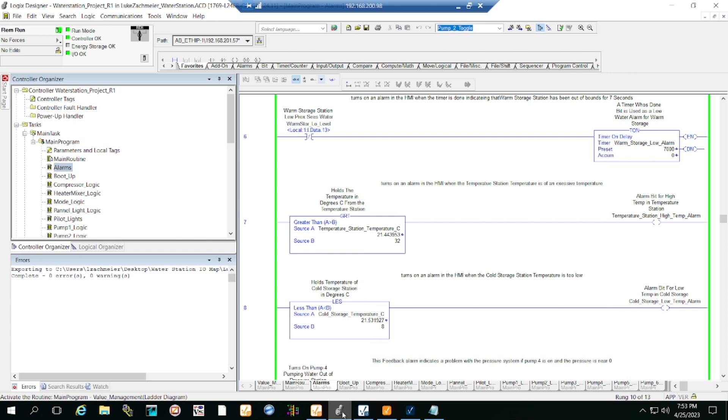Now, if you watch that, you'll notice that this project already has an HMI. So why am I making the same HMI in a different software? I can hear you asking yourself right now. Well, aside from the fact that Ignition is awesome and I really need experience with it for my job, which are both true, Ignition does some things that are really nice for us.

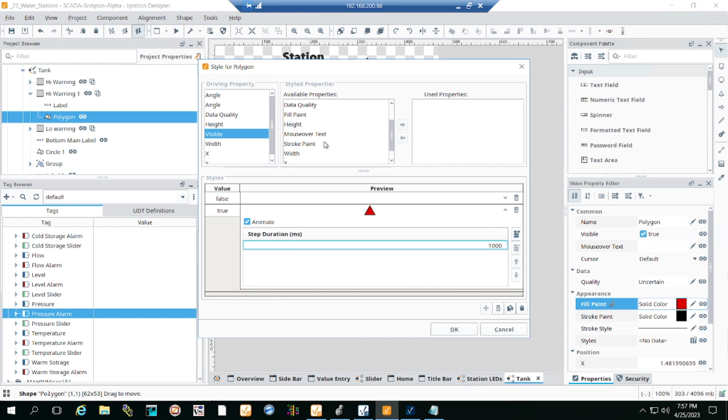First and foremost, I completely ran out of space in my FactoryTalk, and seeing as how it was only designed for a PV1000, which has the dismal resolution of 640 by 480, not even cracking quadruple digits in either dimension, if I wanted to add anything, which I did, multiple things, I wouldn't be able to. And while Ignition won't run on a PanelView, it will run on a browser.

Also, Ignition being newer than FactoryTalk by what I can tell approximately 12 decades means it has a lot of really nifty functionalities that make HMI development a breeze. First, scripting with languages like Java, Python, JSON, SQL, HTML, CSS, and more means that the only limit to your HMI is the time left in the semester and the limit of your sleep schedule.

The only downside here is the complexity. Some things are certainly easier in FactoryTalk, but as far as I can tell, almost never better. It may have taken me a whole day to make a custom slider, but now it's a drag and drop template for me to use wherever I want.

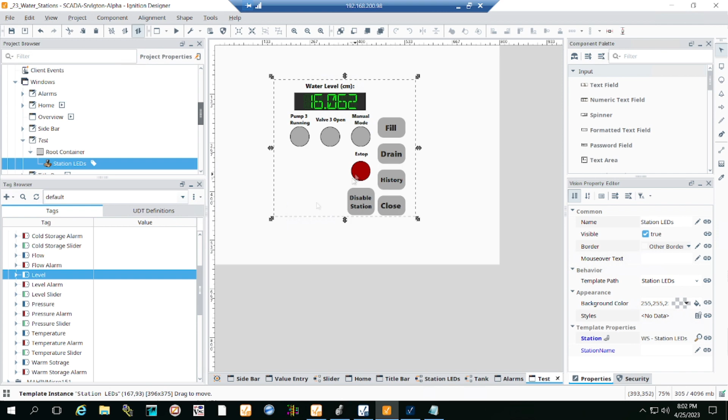Not to mention that with the gateway, from the moment you start a new project, SQL databases and security groups are already all configured and ready to go without the arbitrary 26 security group limit, unlike some other HMIs I can mention. Third, with modern features like templates, custom properties, and UDTs, making graphical windows for all 3,682 of your essentially identical fans has never been easier, and I promise Ignition is not paying me to say any of this.

Finally, name one other HMI software that has an equally comprehensive and in-depth training course, free to use, available to everyone. Go ahead. I'll wait. Okay. We get it. So Ignition is new and shiny, it can do some stuff that FactoryTalk can't. What's my bottom line here?

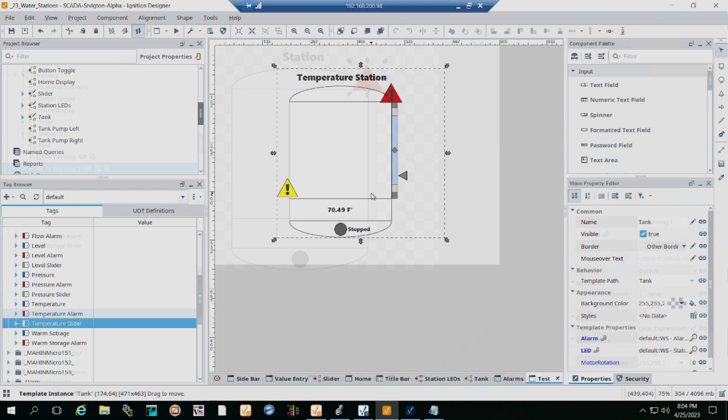Well, aside from upgrading to a graphics scheme from this decade as opposed to this century, the HMI is now future-proof. Think of some awesome new thing that you want to add to your HMI? $10 says you can do it in Ignition, and another $10 says it's easier to do in Ignition than in FactoryTalk or iFix combined. Want to make a circular slider in FactoryTalk? Good luck.

Finally, let's say I add a new station to the project. All I have to do is drag a couple of templates into Ignition, put all my relevant data in a UDT or two, slap them together, and go home. No need to manually bind each and every tag. This concept can be expanded to windows, as you'll see later. Now that my Ignition ad read is over, let's get into the actual project.

The title bar really just tells you what window you're looking at, and also the time and date if you're like me and can't remember what day it is. It also lets you log out and close the window if you have the proper permissions. The overview page displays each station and shows you which direction the water is flowing, along with some basic process information for each station at a glance.

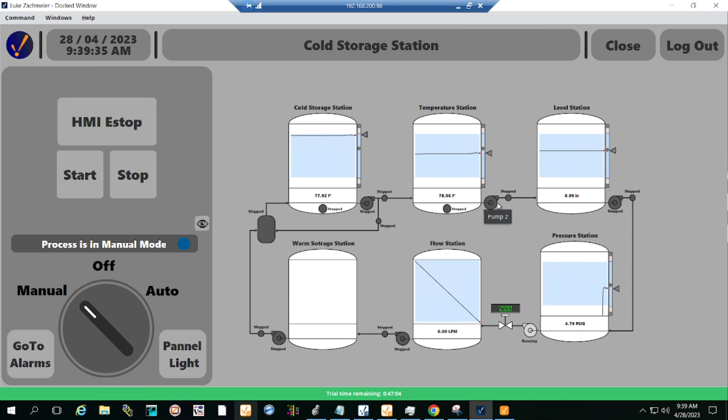It will also show you if the water level is in a dangerously high or low position, as well as if there are any alarms currently active on the station, and you can click on the alarm to take you directly to the alarms page. Now the sidebar here has your system-wide controls, and you can see more or less by clicking this little button here.

Now one thing that I really tried to add to this HMI is almost every object, if it does something or tells you something, you can either hover over it and it will highlight to indicate that it can be clicked, or a tooltip will pop up telling you what it does or what it's trying to indicate. I think that just helps usability a ton.

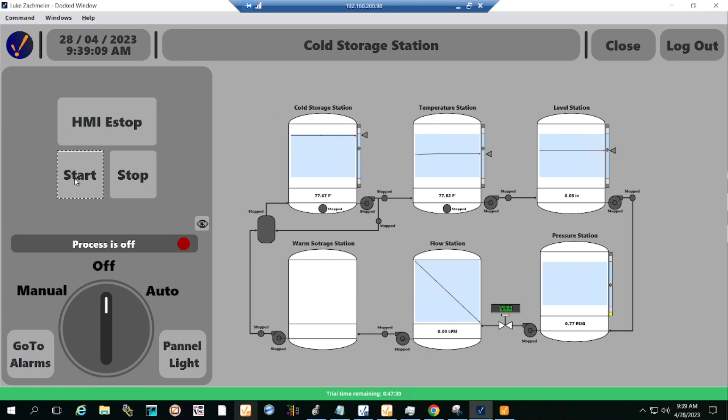Now this overview here is where all the magic happens, because if you click any one of the stations, it will open that station's details. Now this is just one window with a couple templates on it that can display any station's information. I do this by passing the window the station's UDTs when the window opens up, which are accessed by the templates to change what is displayed. But it is from here that you can control each station.

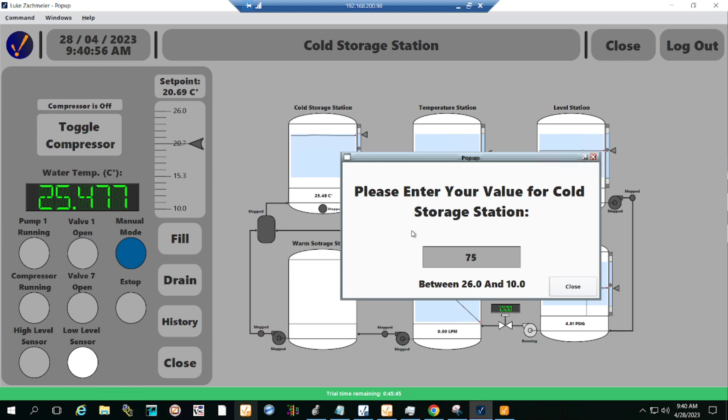And just as before, you can change the units by clicking on essentially any units. I really liked this feature before and I made sure to bring it back into this HMI. However, clicking on some of them won't change the units, but will instead bring up a window to let you enter exactly which value you want, as opposed to trying to get it precisely on the slider, and it will go out to 2 decimals.

Now this is another singular window that I pass UDT information for it to change what it does dynamically. Another really cool thing about this window is if you open it up and change the units, it's not going to break the system. You can enter the units in Fahrenheit and it will convert them to Celsius for you.

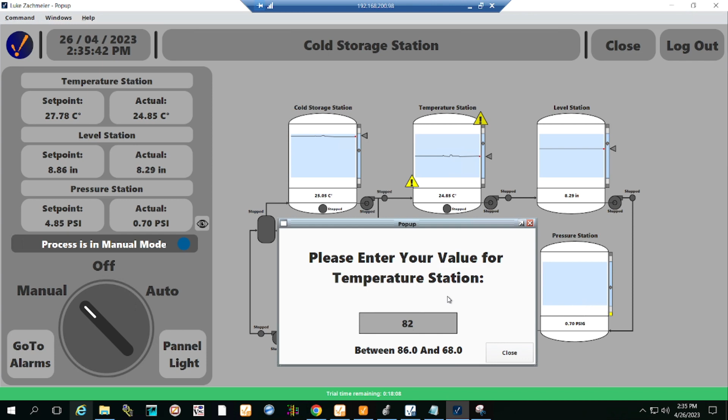Finally, you can go to either the alarms or trending page by pressing the corresponding button. In the alarm page, you can customize which alarms are displayed if you don't want to see acknowledged alarms or cleared alarms. You can also see an alarm history. And to access trending for a station, simply click the trending button on that station's details page. From there, you will be able to zoom in, zoom out, and change the scope of the data you want to look at, as well as change the chart to your liking.

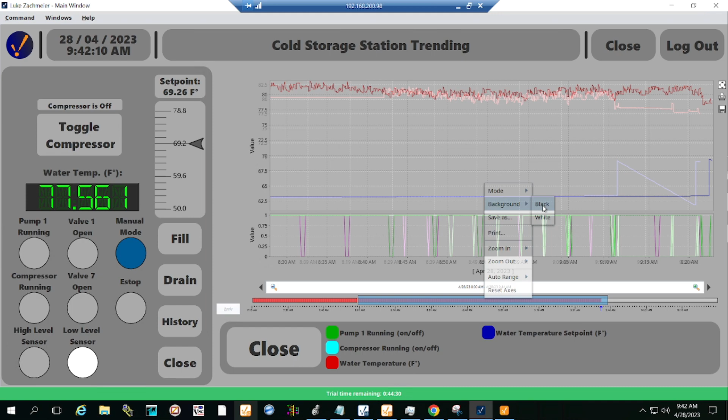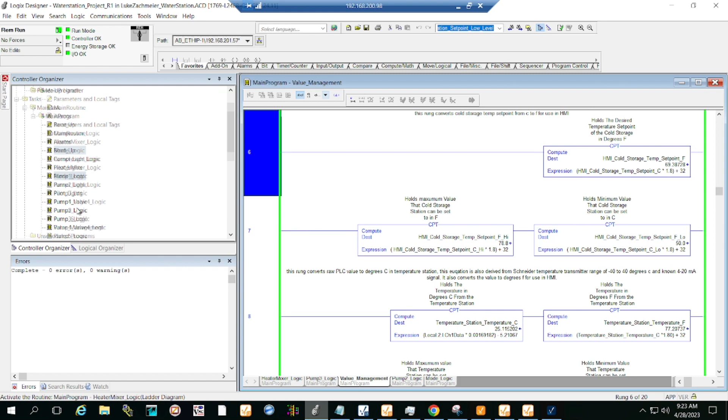As far as the PLC program goes by itself, the only changes I made were I added tags to store the set points in separate units, as opposed to just calculating them and sending them back. This means that if I make another HMI in, say, iFix, I can access those set points without having to do the math in the HMI.

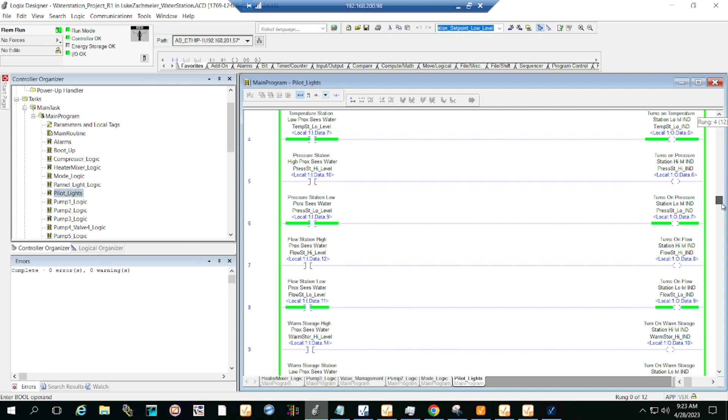Overall, I'm sad that I ran out of time to work on this HMI. There are so many features and additions that I could add that I can easily see myself working on this project alone for another whole semester. However, all good things must come to an end, and as this semester is coming to a close, my sleeping schedule is reaching its breaking point.

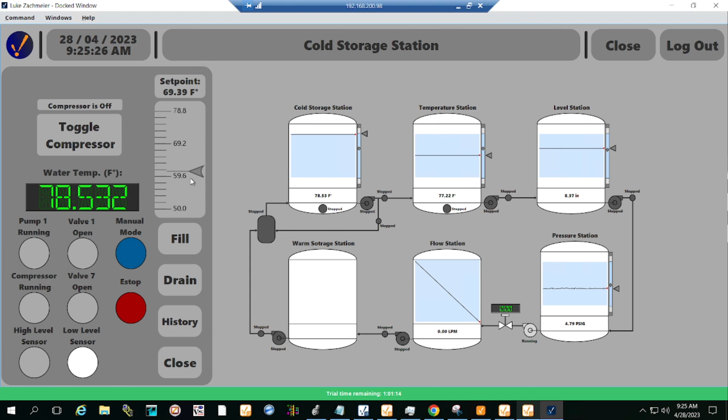Despite that, I think I was really able to explore the possibilities of Ignition and was successful in creating a high-performance HMI style, though even I'll admit it's not the greatest. I certainly made my life 1,000 times easier through the use of templates and UDTs. I think this HMI is more user-friendly than my last one, simply because of the feedback and the tooltips.

However, behind the scenes, this project is a complete mess, plagued by lack of planning. I can't blame myself, as I had no idea what a UDT or template was stepping into this project, and they really just eventually became a heaping mess of spaghetti code. I actually have the same information in 2 different UDTs, and to be honest, I don't even remember why. And the amount of work to configure a UDT by hand at this point is almost as hard as just making the graphic from scratch. Like, if I had 100 of these stations, this wouldn't be a very good solution.

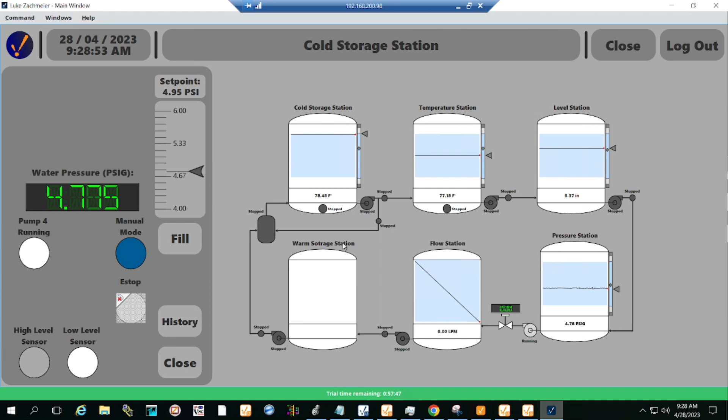So if I could change one thing about this project, I'd probably consolidate all of my information into one UDT, so I could be only passing around one tag in the background as opposed to 3 separate tags with overlapping information. In the end, I had an absolute blast working with Ignition, and I highly recommend that you pick it up and play with it if you ever get the chance, as it's by far the best HMI that I've used this semester. Thank you.